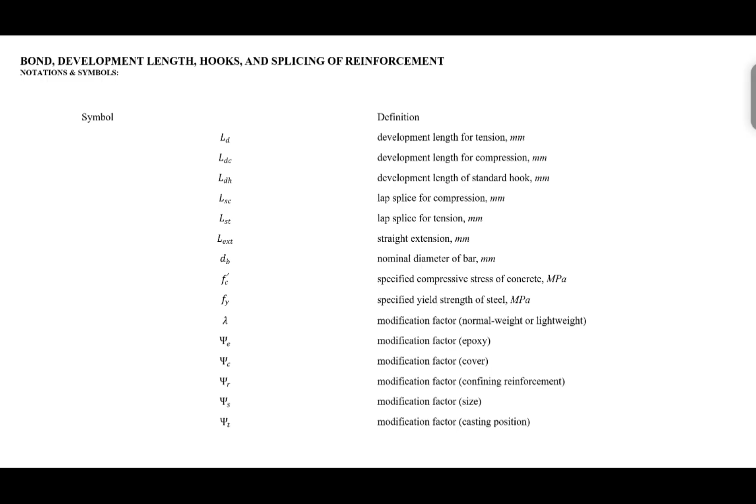Because of the bond between the steel reinforcement and the concrete, there will be bond stress due to the mechanical interlock of the reinforcement ribs and the surrounding concrete. So the bond stress comes from the mechanical interlock between these two different materials.

Now development length is the embedment length of the reinforcement into the concrete, such that this length will enable the reinforcement to reach the full tensile strength, right?

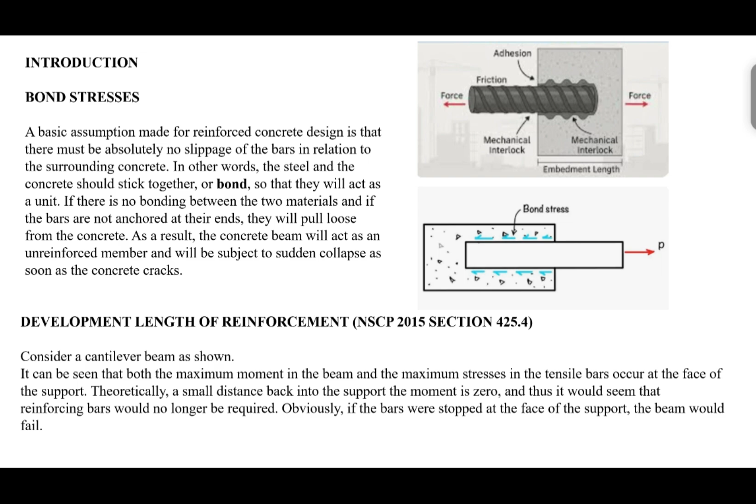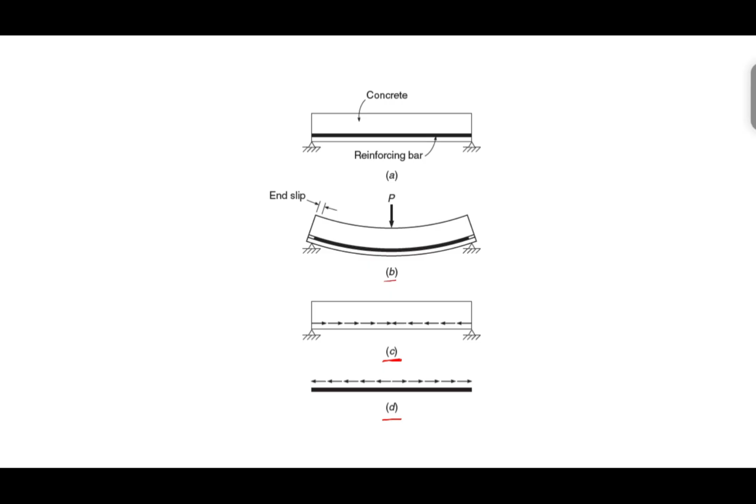Now in figure C and D, these are the forces carried by concrete and steel respectively. In C, we have compressive forces carried by the concrete, while the reinforcement carries tensile forces. In this figure, the concept of development length is highlighted.

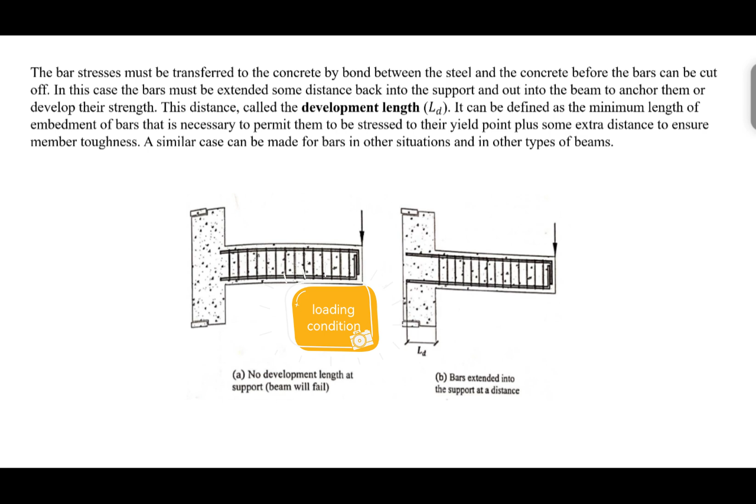What we have here is a cantilever beam with this support condition, such that the moment diagram is something like this, and the maximum moment is situated here. Now past this point, theoretically there is no moment, so theoretically the need for reinforcement past this point is no longer required. However, if we do that, obviously the beam will fail.

Hence, the need to extend this longitudinal reinforcement is a must, so that the beam will not fail. This length here is the development length, in this case in the form of a hook.

We do this if, for instance, the length here is not enough to develop the full tensile strength of the reinforcement, so we'll have it projected further as a 90-degree hook, or probably a 180-degree hook.

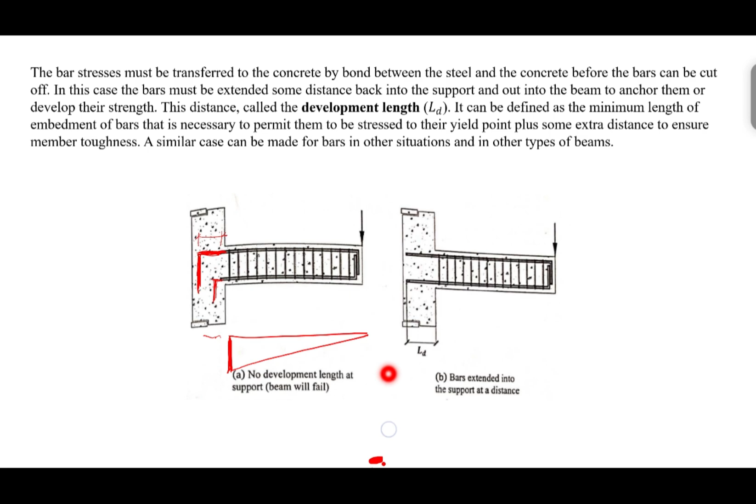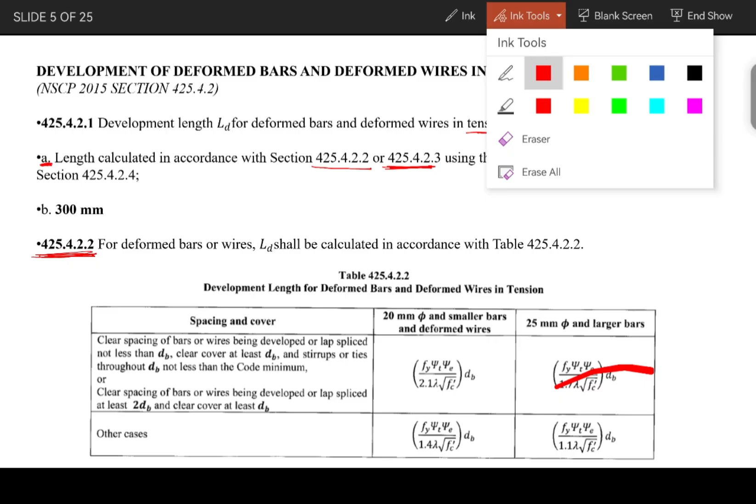So if we have a situation, for example, in which we have a 25 mm diameter longitudinal bar or larger, and the spacing requirements and cover requirements satisfy this condition, then we'll determine the development length from this expression.

So LD will be equal to this, wherein Fy is the yield strength of the reinforcement, psi sub t and psi sub e will be discussed later, and these are factors. Psi sub t is a casting factor, and psi sub e is the coating factor, whether the reinforcement is coated with some coating or no coating at all, whereas lambda is the factor pertaining to the concrete used, whether it is normal weight concrete or lightweight concrete.

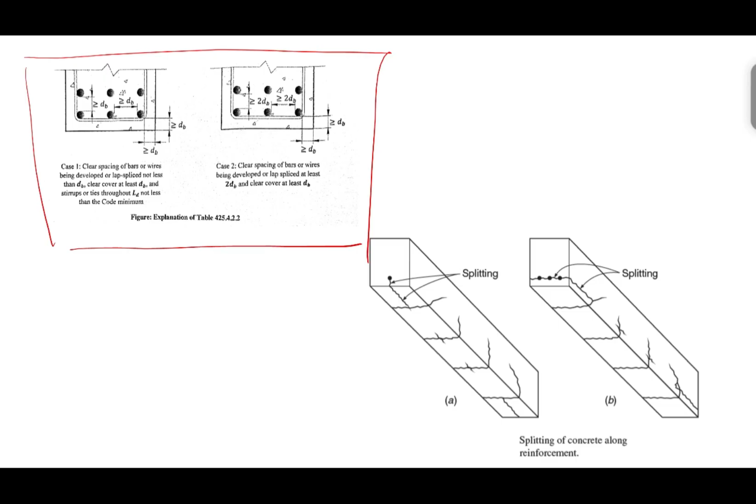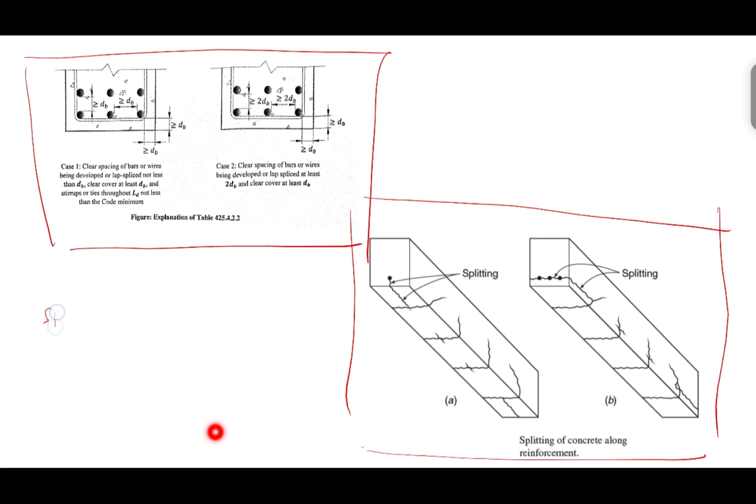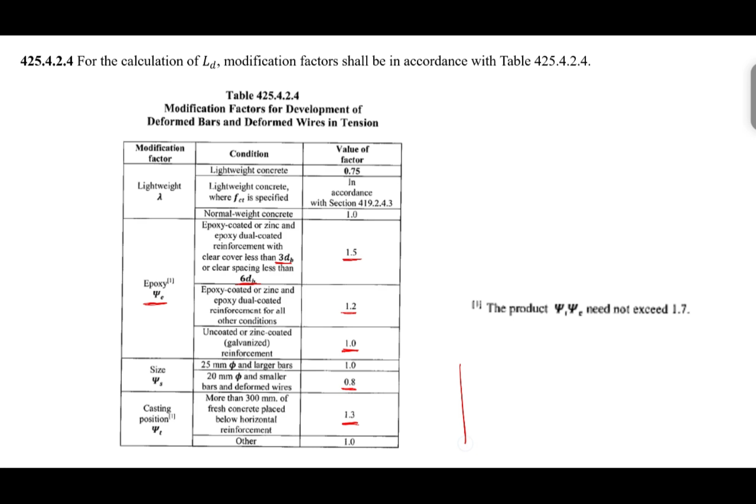So if, for instance, we have this scenario, in which these are the reinforcement to be developed, and there is a depth of more than 300 mm, say 350 mm, then this condition is satisfied, fresh concrete placed below horizontal reinforcement. So if this is satisfied, the factor is equal to 1.3.

Contrary, of course, to a situation in which we have this reinforcement to be developed. As we see, the depth of concrete here is less than 300, and so our casting position factor is equal to 1 for this case.

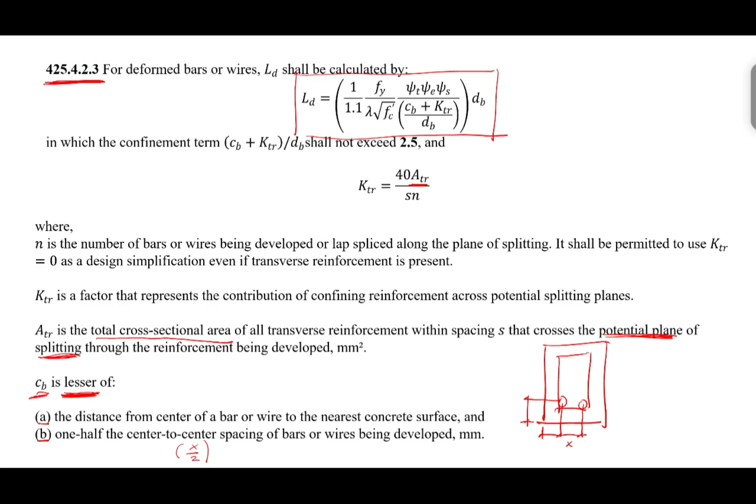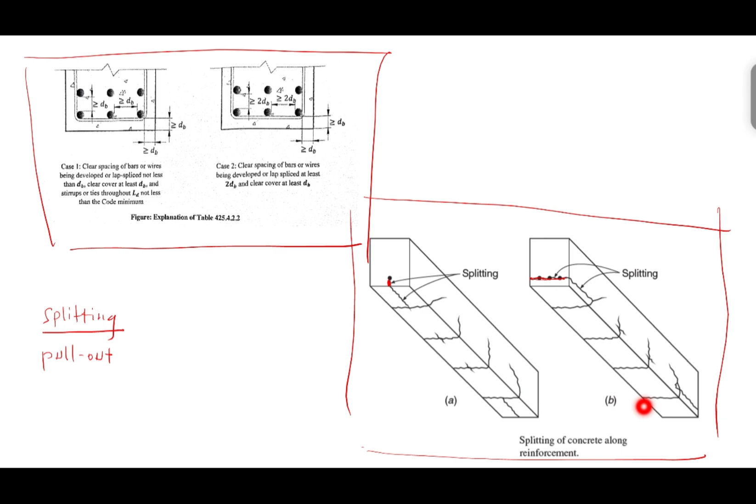Will it be in this manner, vertical or horizontal? We can decide the potential plane of splitting by whichever is lesser between the two values of CB. If, for instance, the lesser value is X, x over 2 rather. The lesser value between A and B is, say, x over 2.

Meaning, the potential plane of splitting would occur in this horizontal manner, because x over 2 is lesser than that of the concrete cover.

Hence, ATR will be the cross-sectional area of this leg of the transverse reinforcement. Because with this type of splitting, horizontal, it tends to cut this leg of transverse reinforcement, the two legs actually. Whereas if the splitting happens in this manner, vertical, it tends to cut this area of transverse reinforcement, which is only a single cross section.

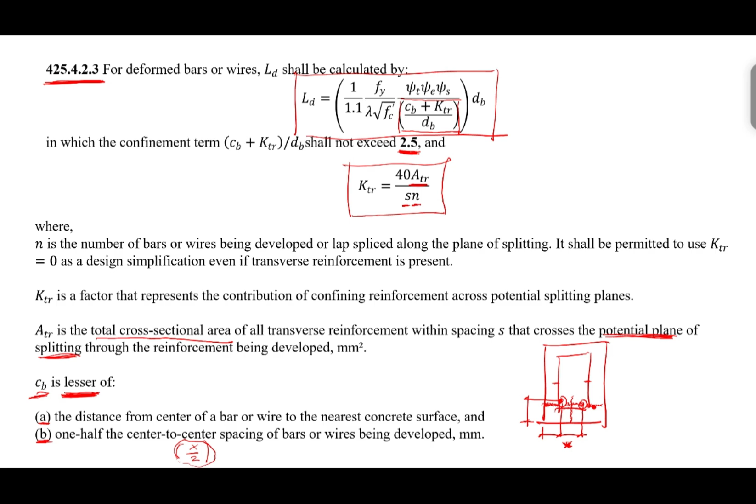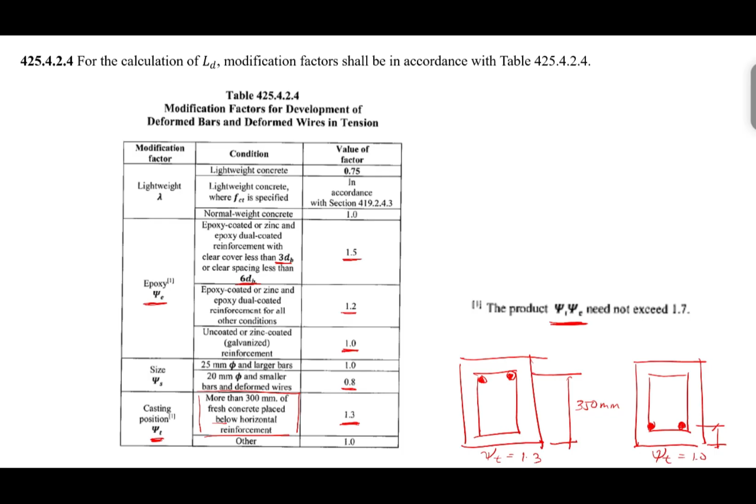In this tabulation regarding the modification factors, we also have to check the product between these factors T and E, that they should not exceed 1.7. For hooks in tension, the development length LDH should be computed based on this formula, this quantity, as well as this length, whichever is greatest between A to C.

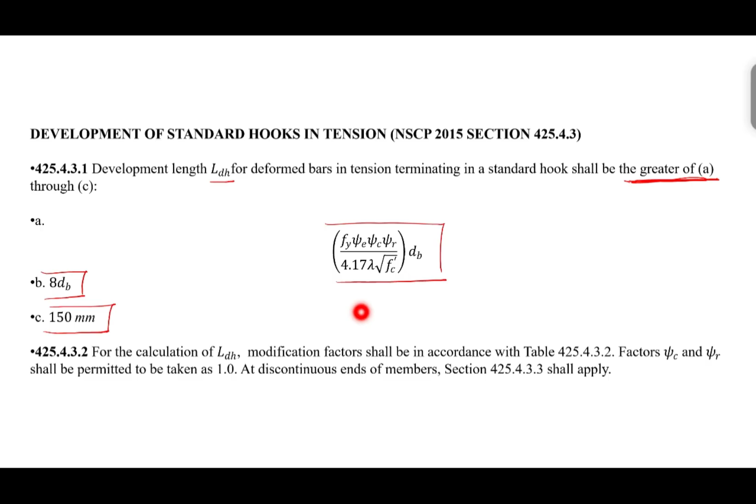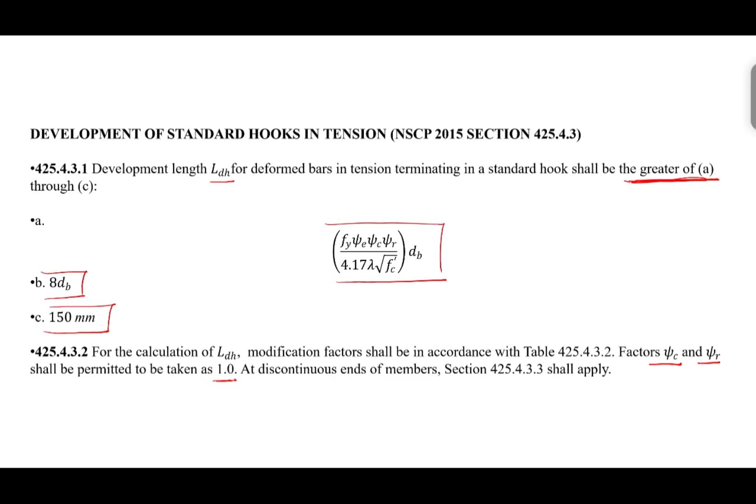It was specified in the code that the factors psi C, psi R can be taken as 1 for simplicity and for conservativity. Here we can take this as conservatively equal to 1.

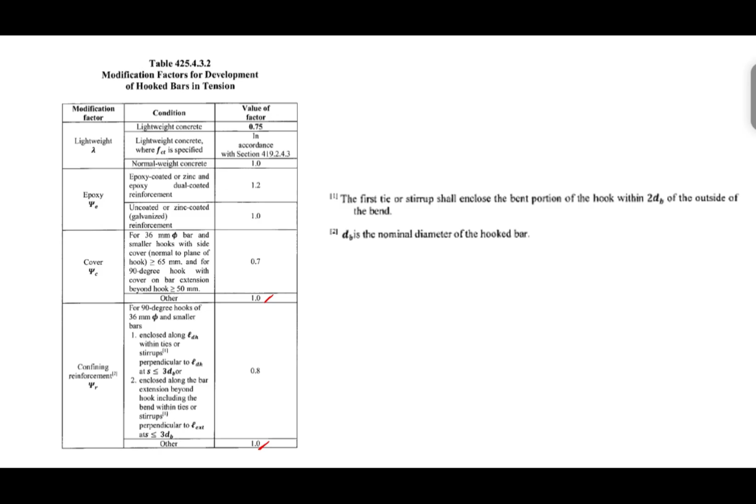After all, the other factors are lesser than 1. Take note also of this provision in the code,

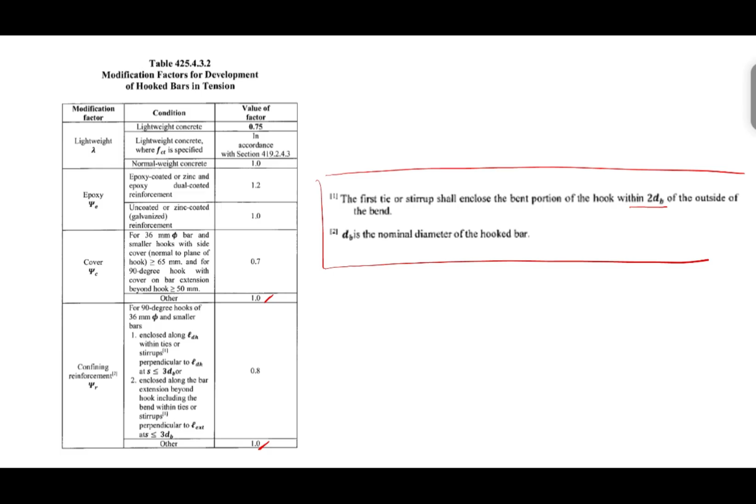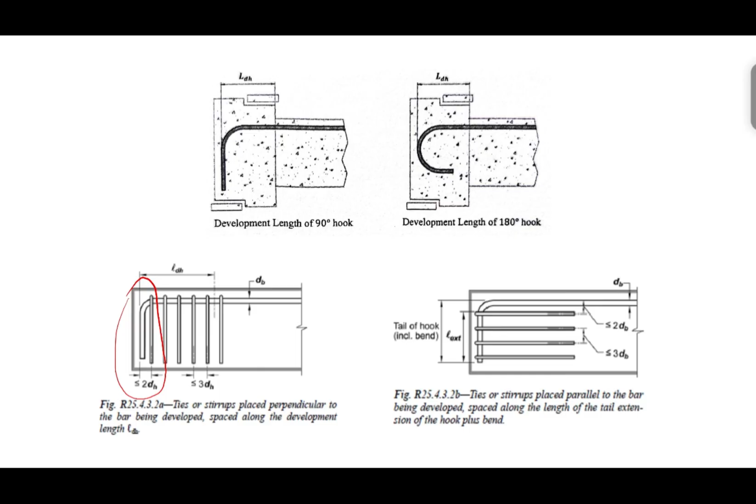that the first tie or stirrup shall enclose the bent portion of the hook within 2 db of the outside of the bend, as seen in here. Other provisions of the code are illustrated in this figure.

Now for development length of individual bars within a bundle, either in tension or compression, the individual bar length must be increased by 20% if we have a 3-bar bundle, or 33% in cases of 4-bar bundles.

Now this expression pertains to a situation in which there will be reduction of development length, for the reason that the required area of steel reinforcement is less than that of the provided area.

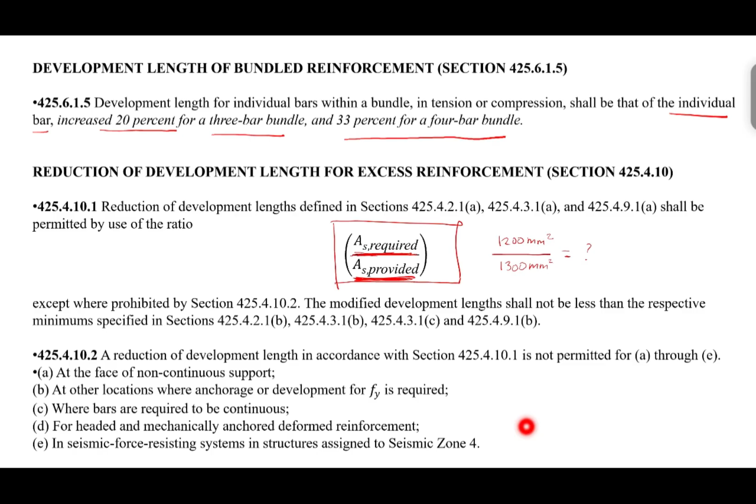Here we have standard hooks, seismic hooks, cross ties, and minimum inside bend diameters. These are provisions as to recommendations of bends for standard hooks, be it 90 degree or 180 degree bend. It was highlighted also in the code that hooks are considered ineffective for compression bars for development length purposes, so it is not recommended to use hooks as a development length methodology if such reinforcement, such bar, is in compression.

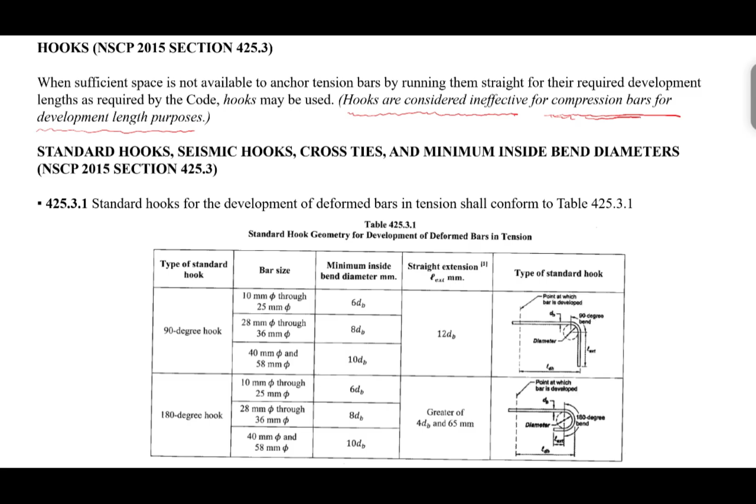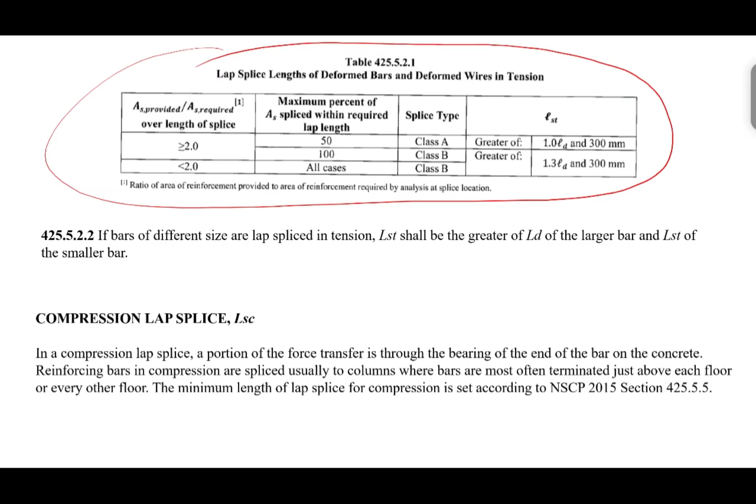The determination of lap splice lengths for deformed bars in tension is calculated based on this table, which is actually this table here, and that LD shall be in accordance with this section.

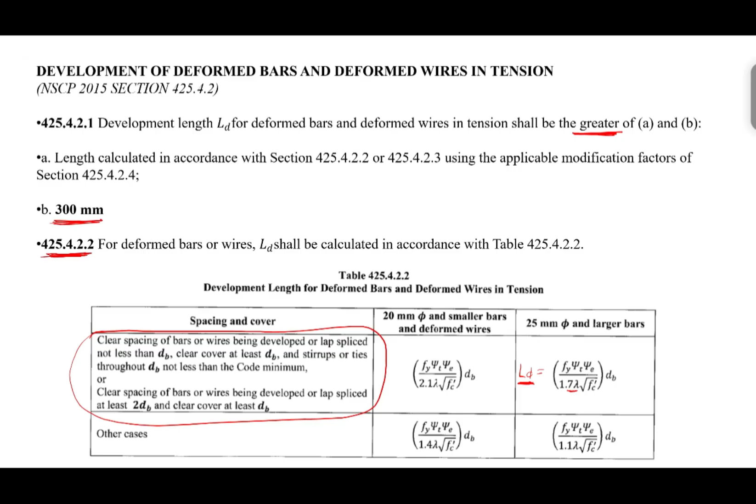If for whatever reason Fc prime is less than 21 megapascal, then the length of lap shall be increased by 1/3. That makes sense because the bond strength is highly dependent on the compressive strength of the concrete.

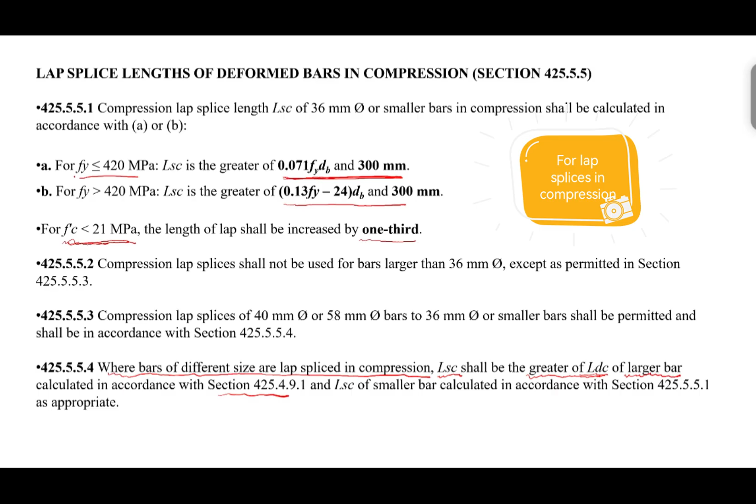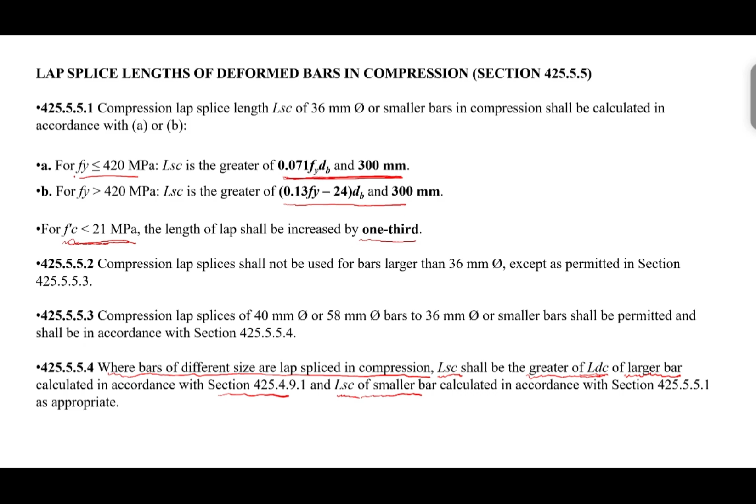In situations in which bars of different sizes are to be lapped in compression, we will determine the splice length as either the greater of the development length in compression of the larger bar, as calculated in this section 425491, or the lap splice length of the smaller bar as calculated in this section here.